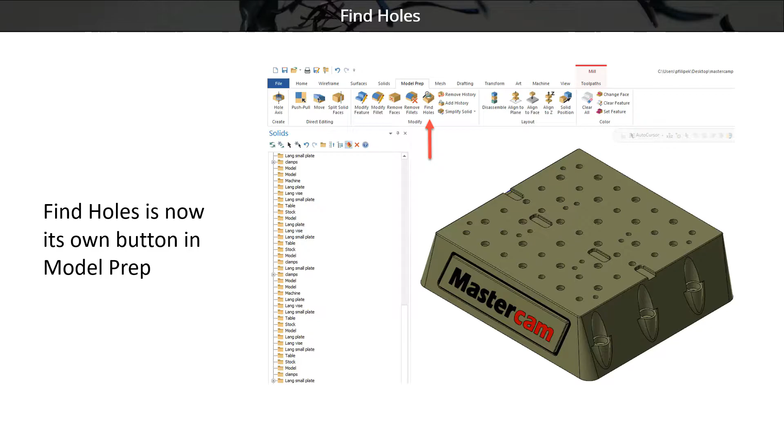So on my screen here, we're seeing a quick PowerPoint of some changes made in 2023. Find Holes for solids is now its own button in Model Prep. You'll see a new button in the ribbon under Model Prep and Find Holes. This will give you the ability to detect holes in a model, and then we can utilize our solids option to maybe alter them in a specific way that we'd want. We'll take a look at this in a Mastercam file coming forward.

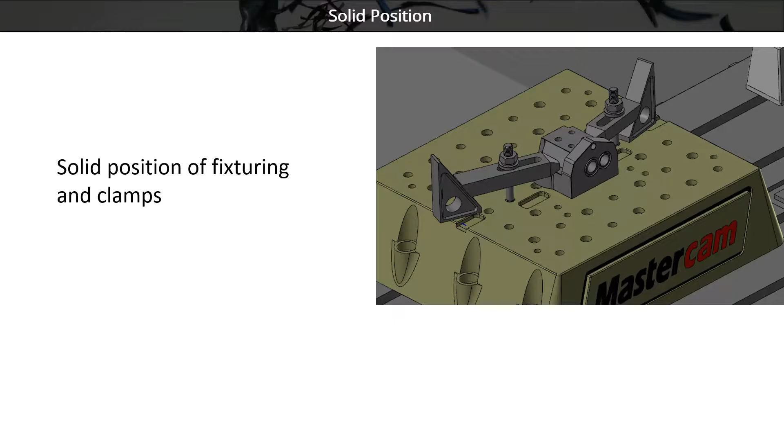Another one that has changed here is solid positioning. We're going to see another option up in our Model Prep for solids to position fixtures and clamps, kind of like you're seeing up on the screen there. So I can take a strap clamp and now mate it to a face that I actually want to put it to. You'll see here as we go through this exercise how I can align that clamp very quickly inside of Mastercam by just picking reference faces at this point.

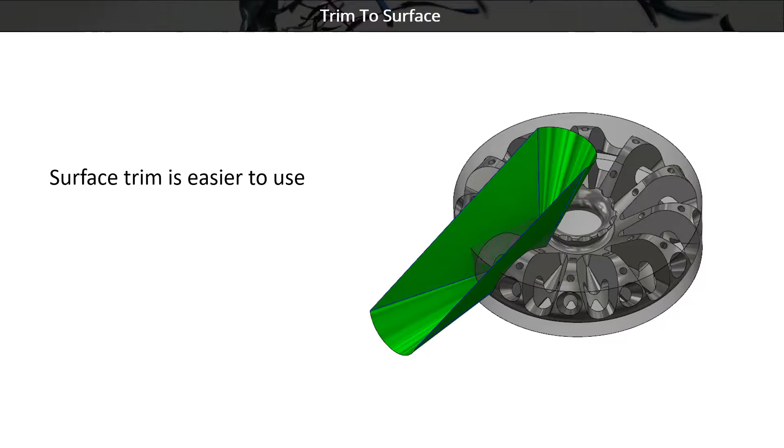Surface trim is easier to use. Back, you used to only be able to pick one surface - it was kind of a hassle. This has been enhanced to allow you to pick multiple surfaces and get the results you want without doing it in multiple operations. So this is just going to be a little bit easier to use going forward.

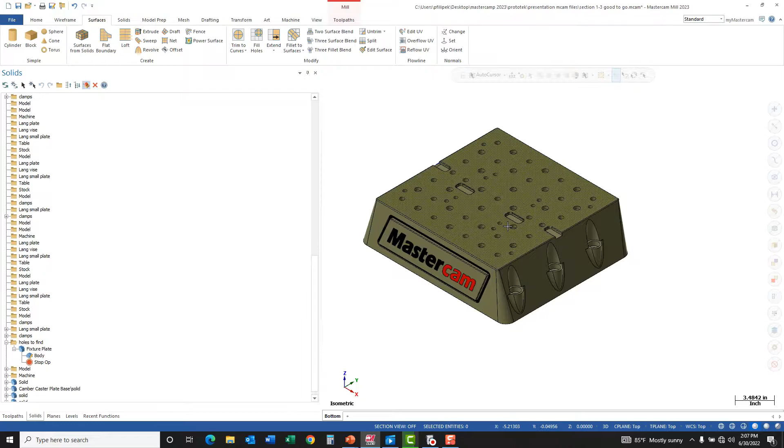So let's go ahead and take a look at this on our Mastercam screen. My first part here has a bunch of holes. In this case, my solids tree, I don't have any holes detected out of this. So what I really want to do is start altering some of these holes potentially. I brought the model into Mastercam, and one quick, easy thing to do here in the Model Prep button is go to Find Holes.

Now this is the new tab up here, ready to be used. So if I go to Find Holes, and I pick my whole part here, end selection, I have some options here as far as hole operations. Do I want to create the plugs, which would be the hole plugs that go into there if I needed them? Do I want to suppress any fillets if I didn't want them? And do I want to include any split holes - a hole that's not completely round.

My selection can go bodies or faces. So if I just want to do a specific face, I could. In this case, I grab the whole body or the whole solid. I can set minimum and maximum radial dimensions to find, so maybe I just wanted to limit it out to a certain size of hole to alter potentially.

And I guess all the associative points and the plugs below this, I could dump them on a specific level so they're not all on the same level. So maybe we'll do that. We'll go there, and I'm just going to put this one on level 1000 and my plugs on 2000 if I were doing plugs. In this case, we're not going to see it because I'm not going to create the plugs. So let's go ahead and green check and see what we get here.

This is going to take a little bit here to perform this task. And once it's done, it's going to give me a report on how many holes it was able to find in the solid model.

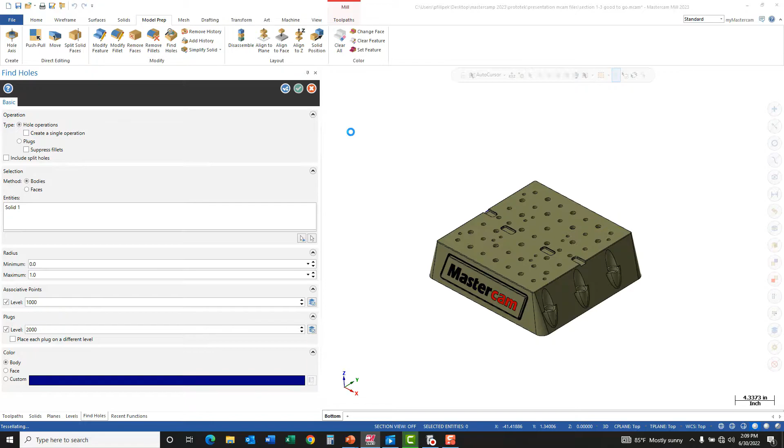71 holes were detected, and you're seeing on my screen here all these points. So them are the points that I was talking about where we can dump them on a specific level to turn them on and off very easily. If I had the plug option, all the holes would be plugged. Them could also be on a different level for organizational purposes also.

So now in my tree over here, I'm seeing all of these. Now I had a folder here called Holes to Find, and this was empty before we started. And now all of these counter bores and simple holes are in here.

Now, where is this useful? This is really useful on models like this one - I brought it in maybe from a SolidWorks where I don't have any history of that model, so it's kind of a dumb solid model, right? There's no history to it. What I just did is I added history completely to this model.

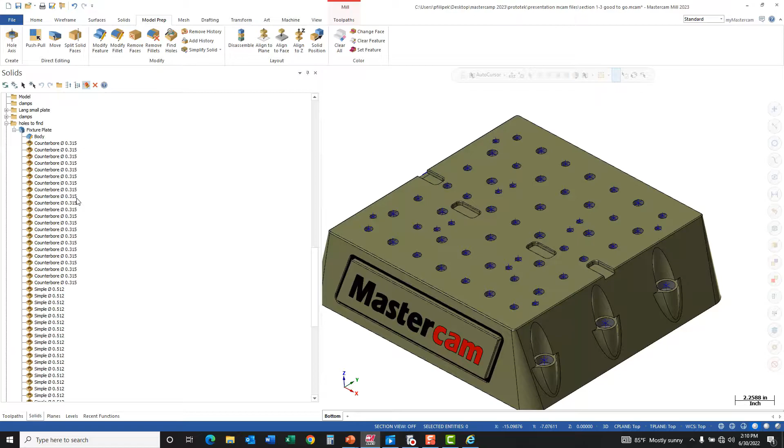So I can click on these and you can see that it'll highlight which one it is. If I double click on that feature, it's going to get me into the hole wizard inside of Mastercam. So this is saying that this is a counter bore. The diameter is 0.3149 with the counter bore diameter of 0.629 and a counter bore depth of 0.314. So it's probably a standard sized counter bore.

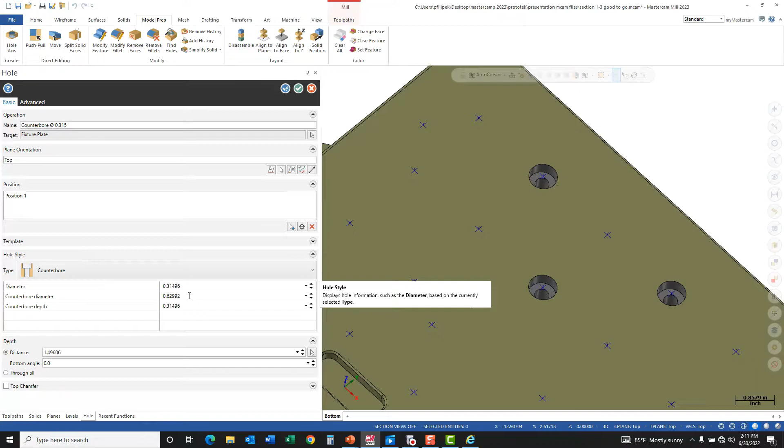If I wanted to make any change here, I could make any change by changing any of these numbers or changing the hole style. Whatever I want to do here, I can do any changes inside of our hole wizard now, where I wouldn't have had that availability before. I would have only had the chance to use model prep push pull on all of them features. So this is a very nice feature.

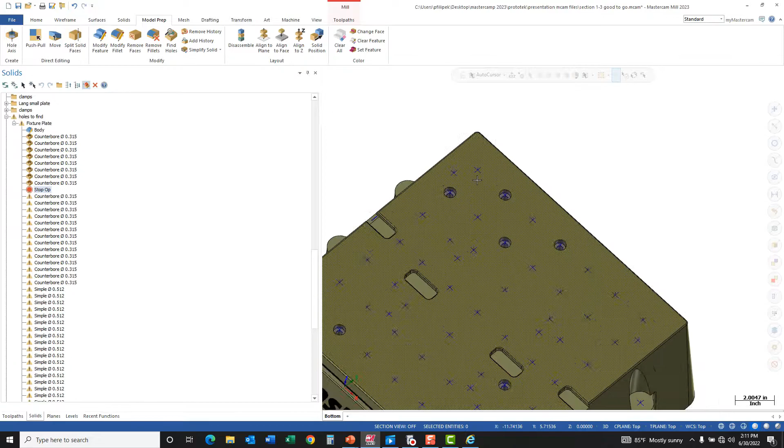Something else in here that a lot of people maybe don't know is there's stop ops on each one of these. So if I drag this up, let's say I go towards the top here, and I'm just going to drop it in between here. Kind of the cool thing is if you want to isolate out specific holes, you can. Now, as far as my stop op goes, it's way up here, so I only have these counter bores above that are shown in the part. If I start dragging that down, my model will show only what's between that folder and my stop op. So that is kind of a cool and useful function there that a lot of people don't know about.

And that's going to kind of do it for find holes. It's going to allow you to take a dumb model, as I like to call it, and put some history into it so I can easily alter any of the holes that are in that part, or counter bores, or whatever it is for holes. So maybe you could take a peek at this one if you're into them situations where you need some history put back into these files.

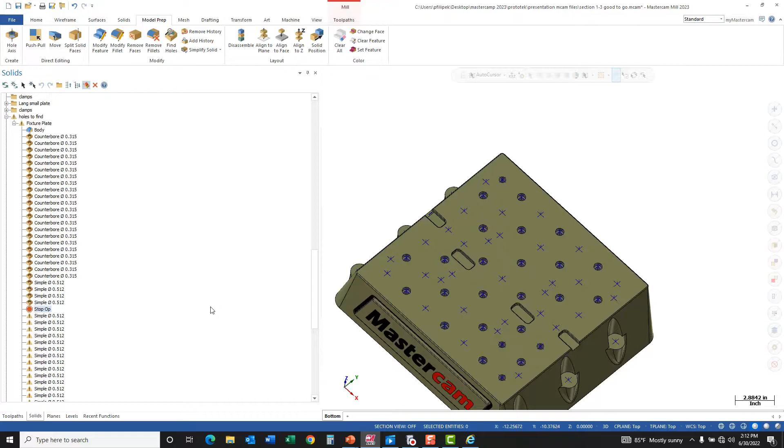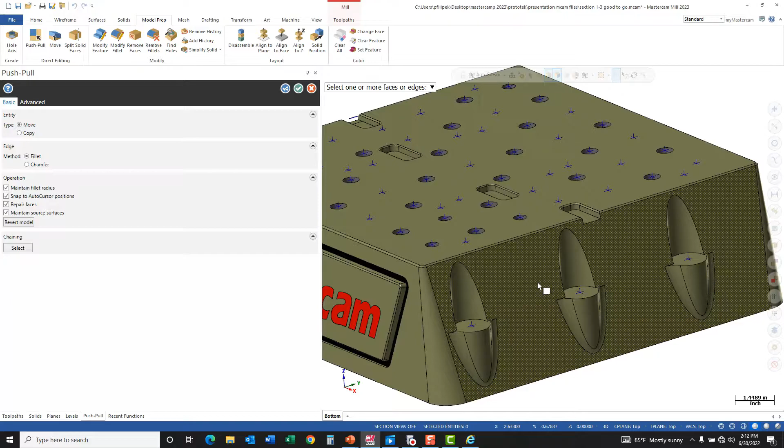We're going to stay on this part here, and I'm going to remove the history, and I'm going to go into a push-pull function. So push-pull has been great. If I want to push-pull a face or push-pull an edge, I've been able to do that quite easily. One of the big changes in Mastercam 2023 is if I pick an edge. Now, this is going to work the same. Anytime I pick an edge, previous to Mastercam 2023, it always put a radius on there. So I could grab this and start pushing a radius on there. This is the same behavior as I'm used to, previous to 2023.

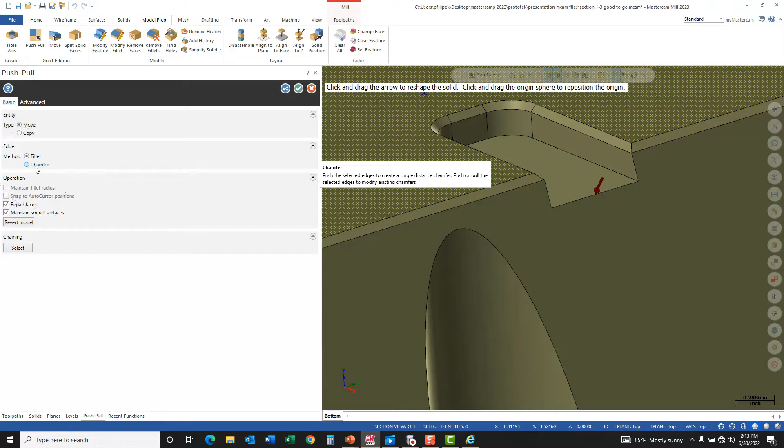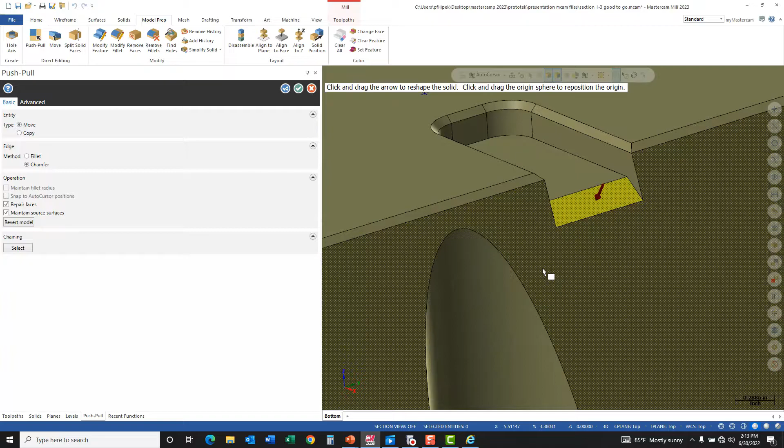Now, one of the other options they added here was method of chamfer. So instead of putting a radius on there, now I have the availability to put an actual chamfer on that edge that I want. So that's one of the great changes. I love that one in push-pull, because a lot of times I wanted to just push a quick chamfer onto something, and I couldn't do it in push-pull. I had to go and model that in the solids menu or extrude it in a way that took a few more steps. So this is a great little move going forward, and I can flip between a fillet or a chamfer. That one is one of my favorite ones here in model prep for sure. So definitely check that out if you're looking to apply some chamfers to the part.

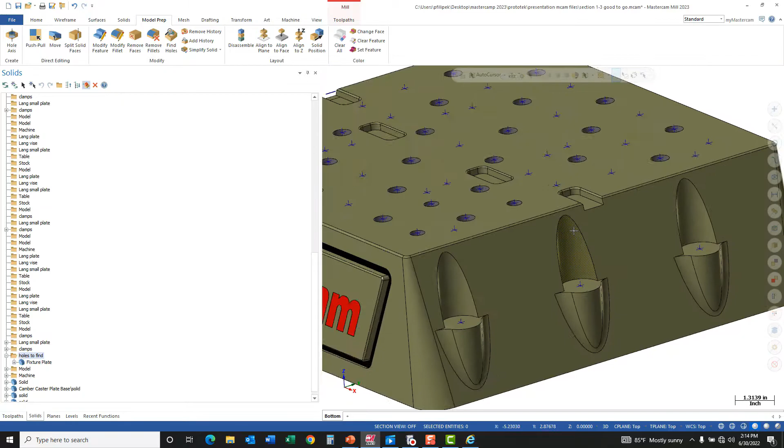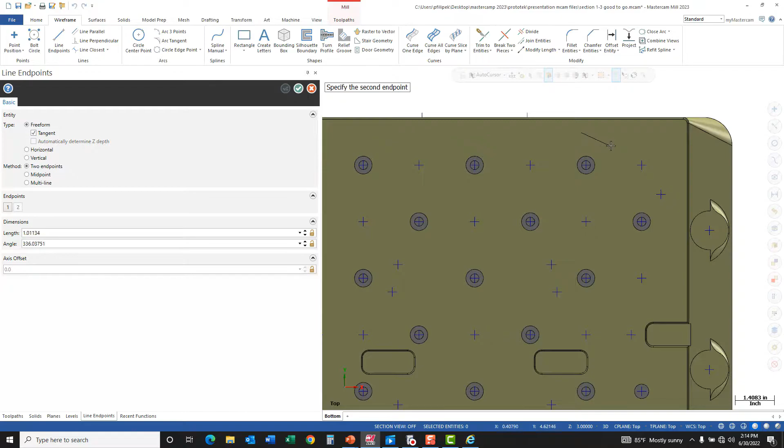We'll stay on topic here. Another change they did, and this one is a good one too, because I find myself doing a lot of splitting solid faces, depending on what I'm doing on that specific part. So what I'm going to do here is draw a line across my part, across this angled face here. And looks like I didn't make it through the part, so I'm just going to extrude this up so we can see it above our model here.

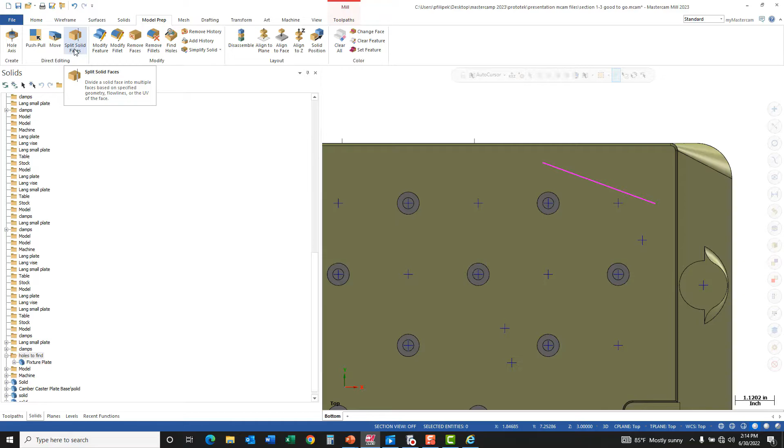So here I have my wireframe. I'll leave it in pink so we can easily see it. And it doesn't extend to the edges. Now, previous to 2023, your wireframe had to extend to the edge to split that face. In Mastercam 2023, when we go to Model Prep Split Solid Face, I can go ahead and pick this face.

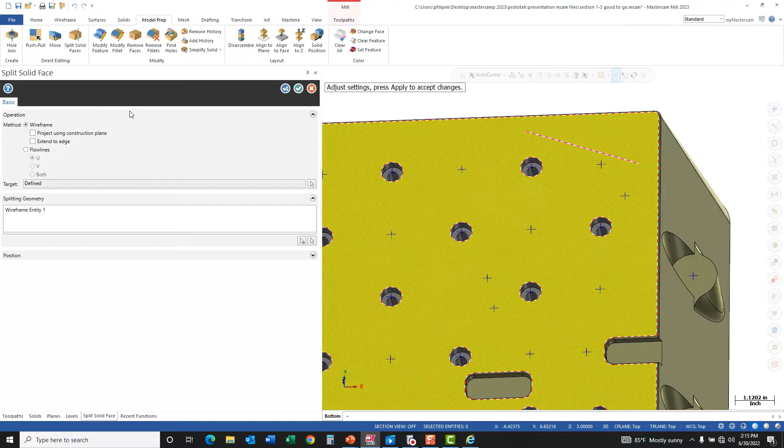And now I can go and select this wireframe. And I can end selection. Now, right now I'm getting the same result that I would expect if I didn't have this new functionality. I'd have to get it to the edge for it to split. But now in our operations, we now have extend to edge as an option.

So if I go ahead and left click on extend to edge and green check, now you're seeing that it took this pink line that I had and extended it all the way to the edge. So I no longer have to worry about extending any lines to the edges. I can have whatever line I want and it'll take that line all the way to the edges, which is sweet.

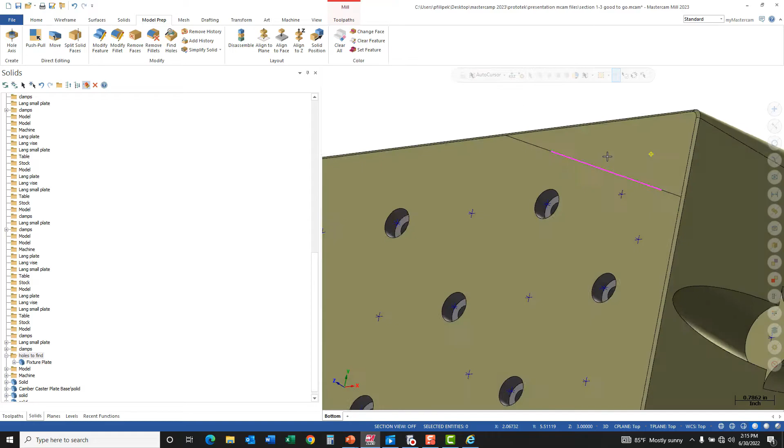So now I can go ahead and grab this face if I needed to do something to just this specific face or specifically this one. So that's another very good change here in the model prep: the split solid faces and extend to edge option. That's a great option to be using.

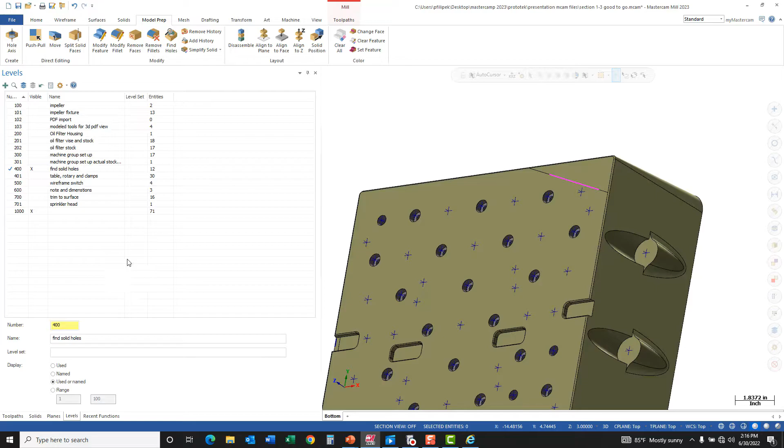And now we're going to take a look at some other stuff here. There are my points. I should point that out, how I moved them to a level. There all my points are. So if I had to do a multi-axis toolpath to drill all these, or just even a drill toolpath, it'd be an easy pick to go ahead and grab them. So keep that in mind.

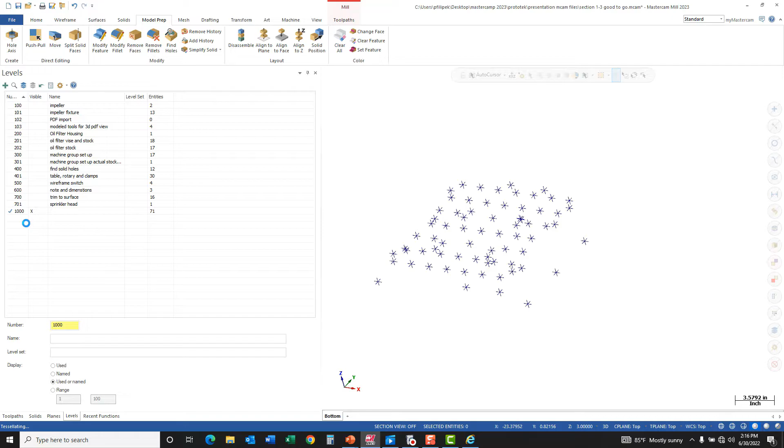Let me turn on some stuff here, and we're going to take a look at positioning these clamps. So these clamps are currently looking good here. So just to explain this out a little bit, I'm going to segregate some of this to make this a little easier to see. So I'm just going to organize this, and I'm just going to move this to a new level here.

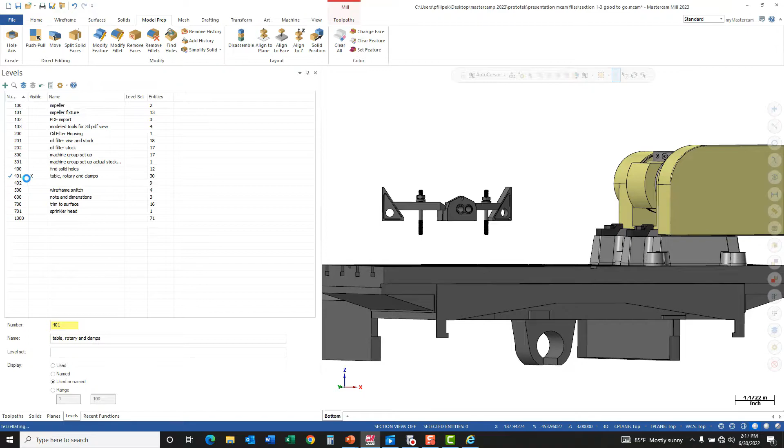There we go. So right now, I'm seeing this in a way that is already good, but I'm going to break this and then we're going to go and fix it. So up in the model prep option, there's a solid position. This is a new option up here. So what I can do is select a face on the body to be moved. So I want to move this clamp up to the bottom of this nut.

So I'm going to grab that, and what it does, it puts our dynamic gnomon on there. Now if I had to move this around, I could shift this around. I could snap to points on here to position this. And this is going to be the first face that's going to slide to another face and then stop. So now it says use the gnomon to define the center of the rotation. So I have it set where I want to.

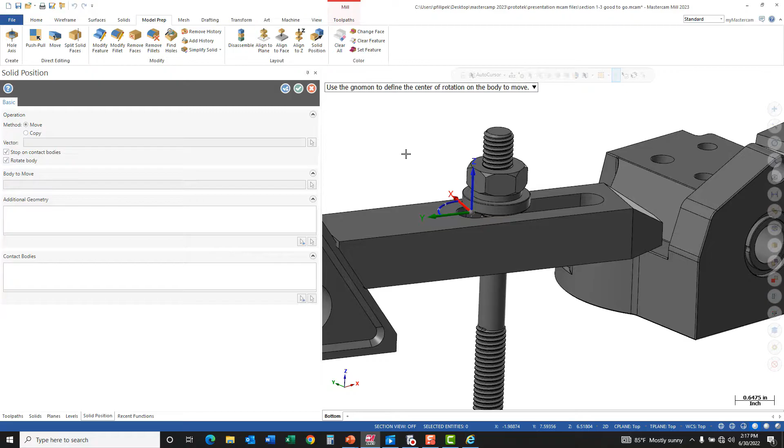I hit green check and it says select the contact bodies. Now I want a contact on the bottom of this nut, so I select it and go end selection. So now what I can do is grab the Z and see how I can only push it up so far. And once I green check, now those two faces are mated.

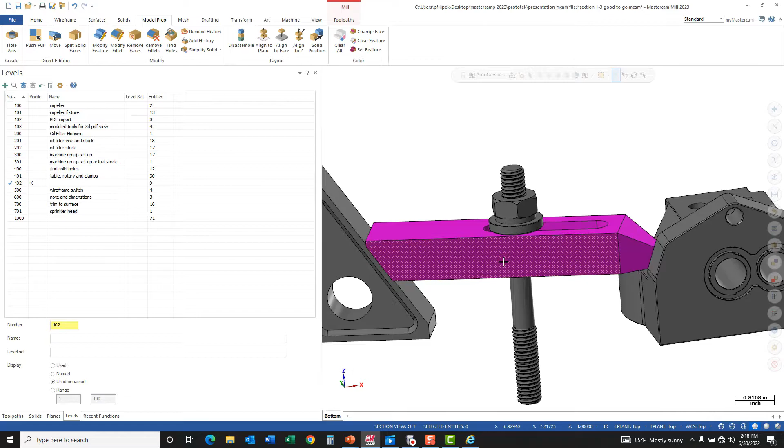Now where does this come into play? Potentially some different areas here, like on this part. So we're going to do the reverse of what it was here. So let's go ahead and reverse these steps. Solid position. I know that I want to have the bottom face mated up on this face of this part. So I can select that.

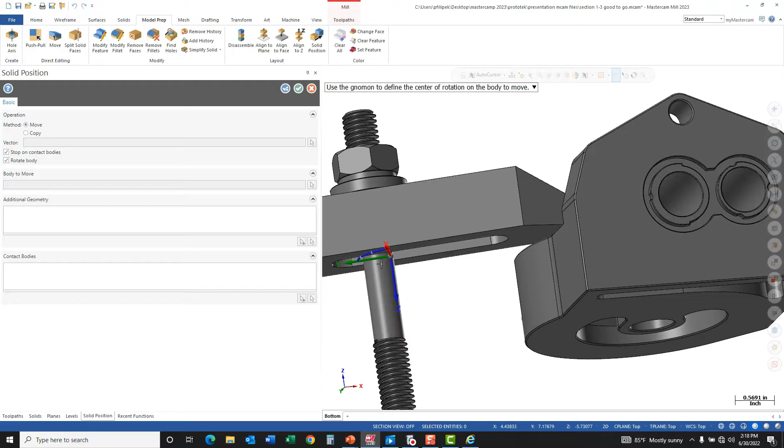Once again, if I didn't get this correct, I have all the dynamic functionality here to move this around to different faces that I would actually want to align to. I hit enter, and I'm going to pick this face, and I'm going to say end selection. So that'll come back, and now I have the ability to just come here and drag this down.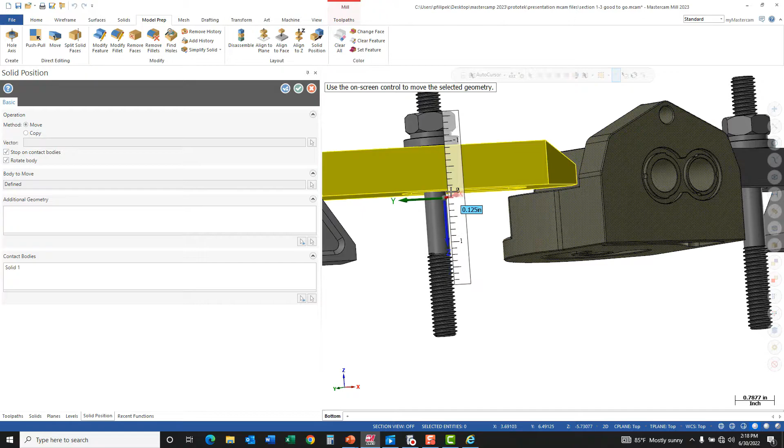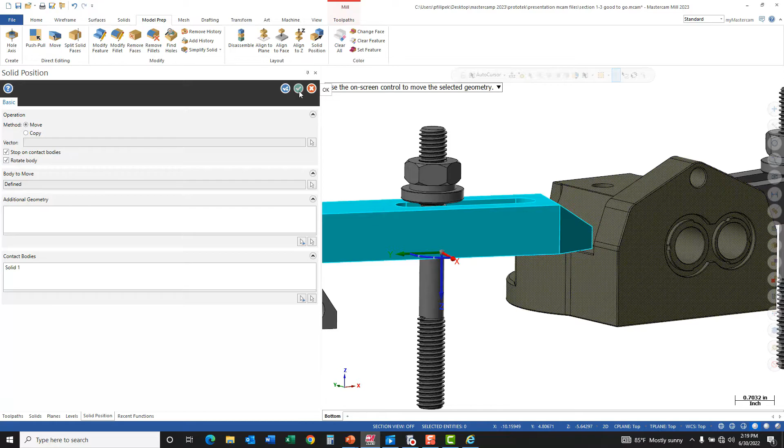And as soon as it hits and has nowhere else to go, it can't push it down anymore, you can left click, and it'll mate that bottom face of that clamp to the top of your part. So now this is going to take out any of the guesswork or the extra work that you have to do with dynamic motion. This will actually push it down for you pretty easily. So if I green check out of there, now that's all aligned.

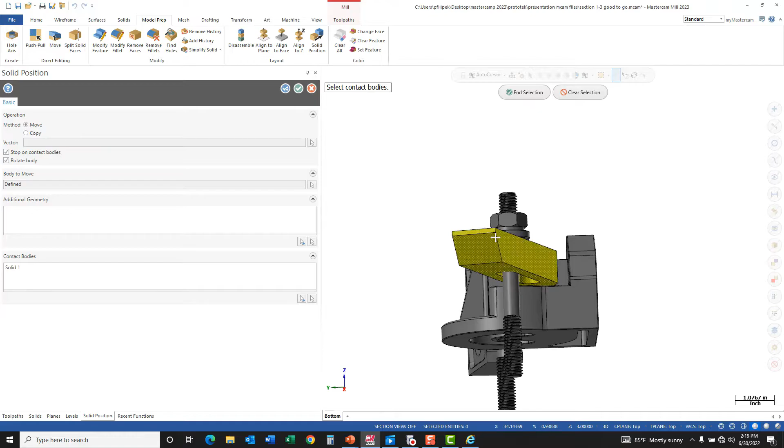Now we could do the same with the aligning block. See how this one's already inside of that block? So that could be a potential issue there. I could go to solid position, and I'm going to say I want to pick this face, and this is going to be my reference. And now I could slide this up to that face until it interferes.

I just left click, and now that clamp is no longer inside of that face. It's on the face or mated to that face. And it could be the same with this nut feature here. I could slide that down if I wanted to using the same function. So solid position is kind of cool.

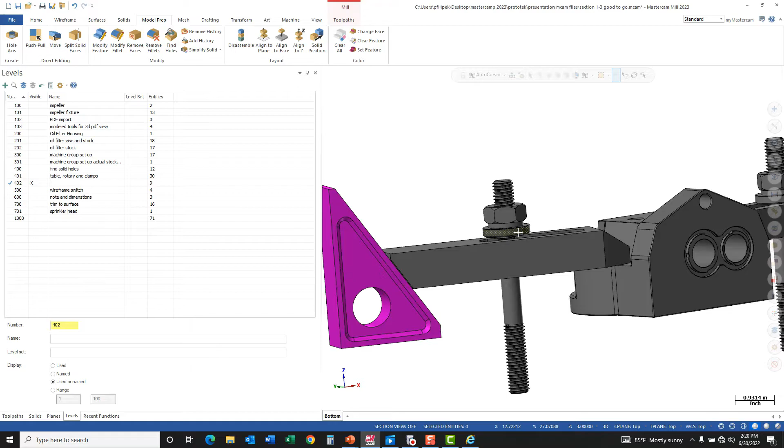You pick what face that you want to reference off. You go and pick the face to slide to, and then you just use the dynamic gnomon to push that up. And as soon as it finds interference, it's going to stop at that point. So another good change they made here that is pretty cool to be able to do that and automate that out. And going forward, I'd imagine they're going to implement this into a lot more functionality here. So stay tuned on that.

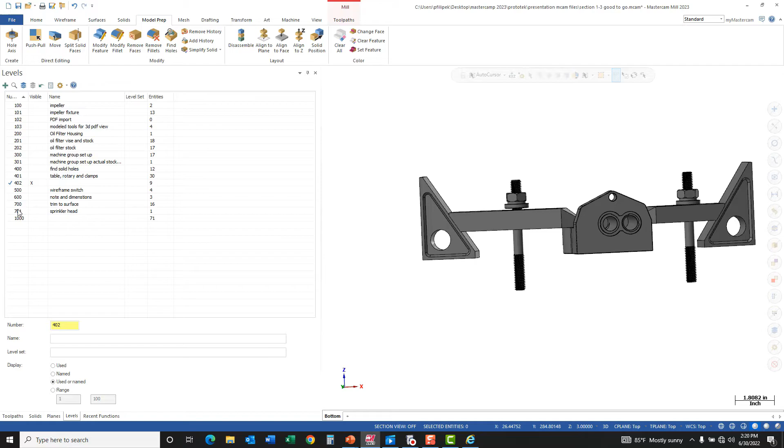And then the last thing I want to talk about with the surfaces and solids is actually a surface function that they enhanced a little bit. So what we have here is this sprinkler head part, and what I really want to do is machine all of this out, and I want this all to be one surface. Maybe if I'm using a flow line toolpath, I just want to eliminate any of them holes easily.

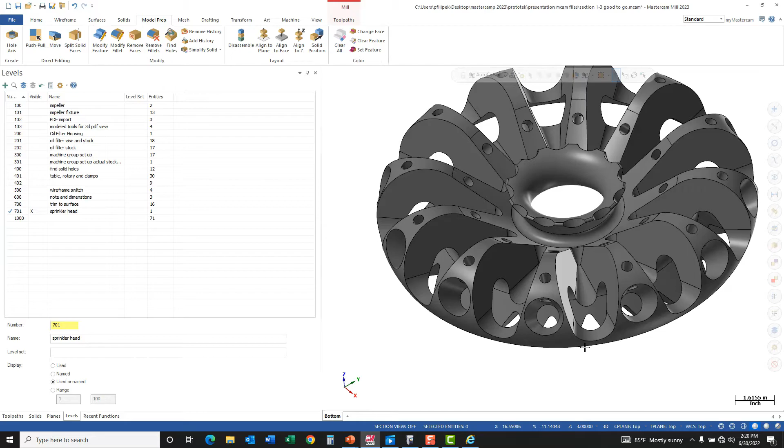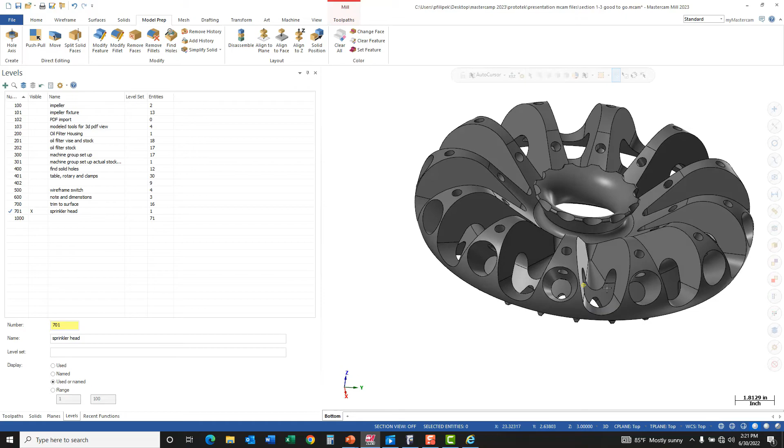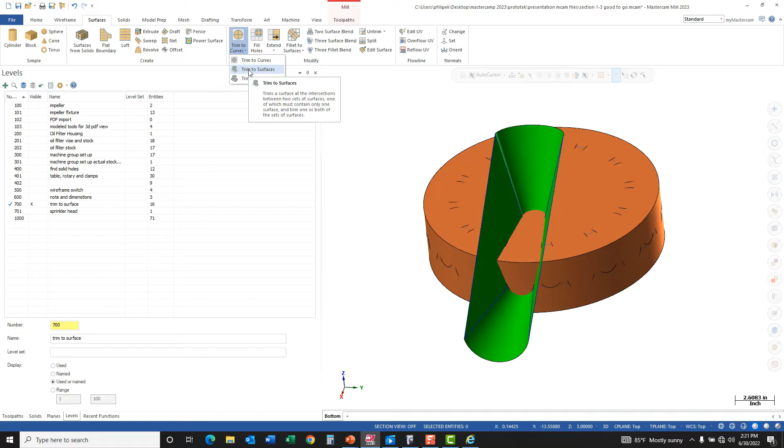So once we come back to here, we're going to go up to our surfaces. We're going to drop down under Trim to Curves. There's Trim to Surfaces. Now we've always had this option, but previous to 2023 you were only able to pick one surface at a time. So it was kind of a tough one to utilize on a part like this. So to select the first surfaces, I'm going to select this one, and end selection. It says select the second set of surfaces. So I'm going to pick all of these green ones and end selection.

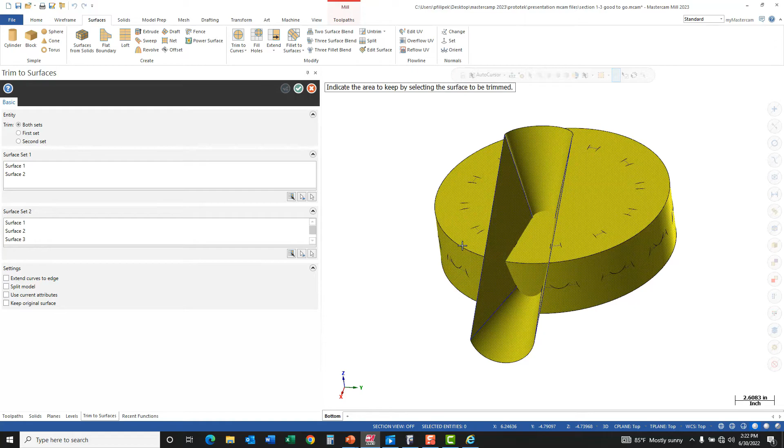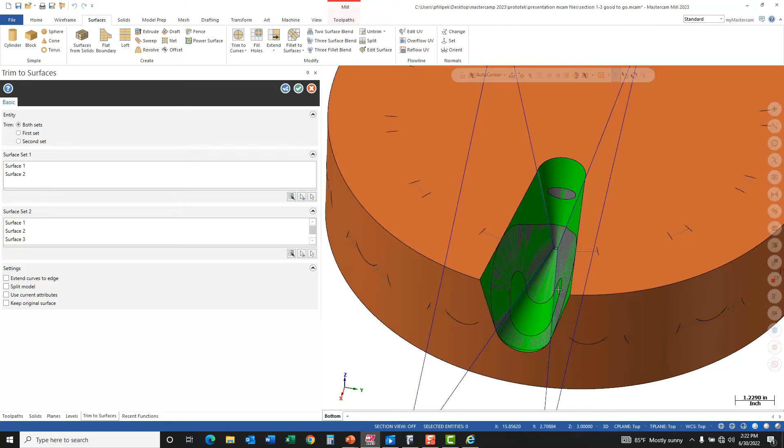And now it says indicate the area to keep by selecting the surfaces to be trimmed. Well, I want to keep this, so I click on it. And I want to click here, and I want to keep that. So as soon as I slide over that, you're just indicating what to keep. And now I have a surface that is sitting all the way inside of that profile. So now this probably makes it a lot easier for me to machine this, potentially with the flow line toolpath. So if you're a big flow line toolpath user, this is pretty handy because now we have one nice flowing surface in there.

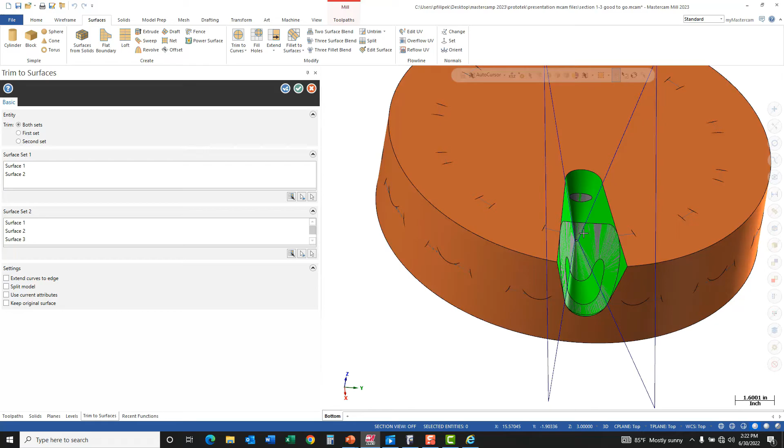You can see it trimmed it off very nice, and it really matters where you're clicking. You have to indicate to keep it here, and then you have to indicate to keep it on that green surface that was underneath there. So that's one of the main changes here. As far as other options go, we could split the model where it's going to bring that back and split that all out.

Extend curves to edge. Same kind of situation here where if you're trimming them off, the extension will keep your curve going so you don't have to have it all the way over that surface. And the other ones are just going to be for attributes. And keep original surface if you wanted to keep that in there, not delete that out. So hopefully you can go back and check this out. This is a nice little function for the people that are using a lot of surfaces.

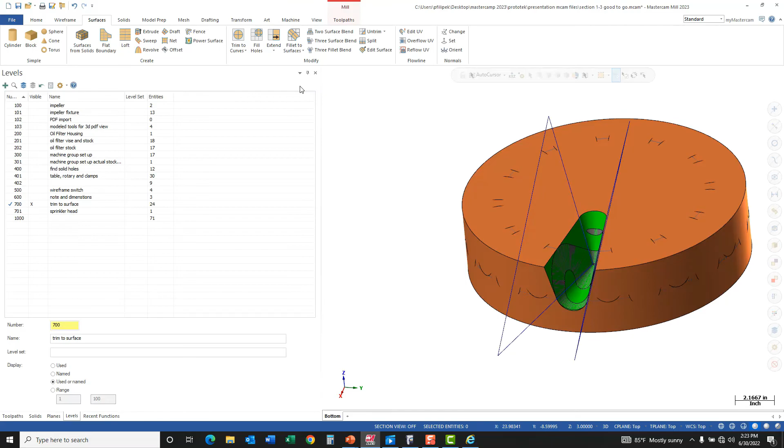And that's going to do it for our surfaces and solids updates in 2023. As you can see, there's some nice changes in there. The moving clamps to interference is pretty nice. Find Holes is evolving. And when you merge files in, you will also have the Find Holes option built into them options. So when you go there, you'll see a Find Holes checkbox. If you check that, it'll automatically find that for you. So keep an eye on that, and hopefully you can utilize that.